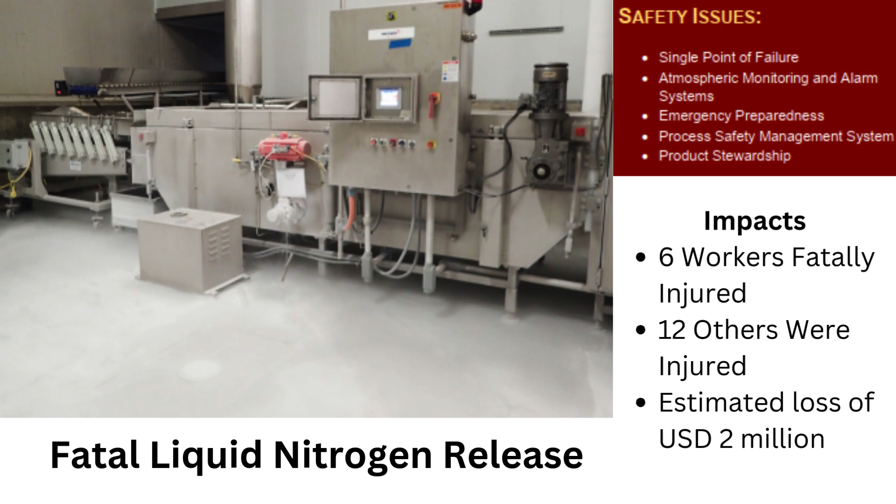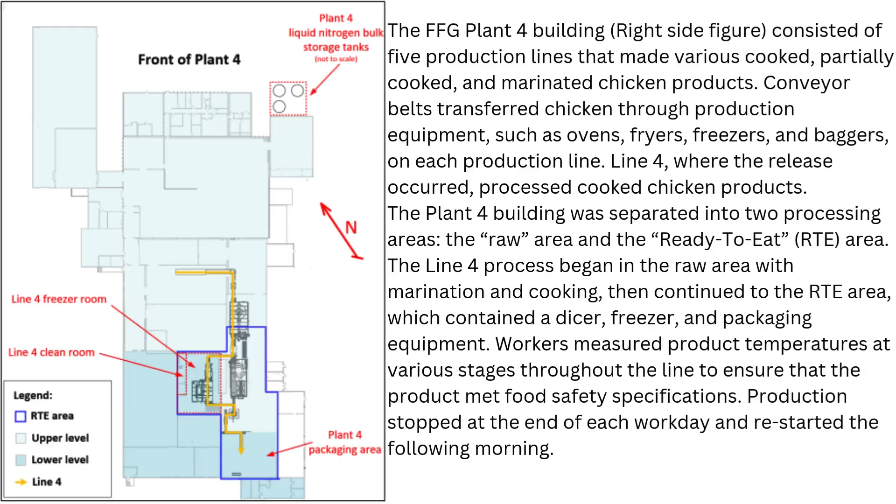On January 28, 2021, a catastrophic liquid nitrogen release occurred at the Foundation Food Group plant in Gainesville, Georgia. The incident happened during maintenance on a liquid nitrogen immersion freezer, resulting in the release of vaporized nitrogen that displaced oxygen. 6 workers tragically lost their lives to asphyxiation, and 12 others, including a firefighter, were injured.

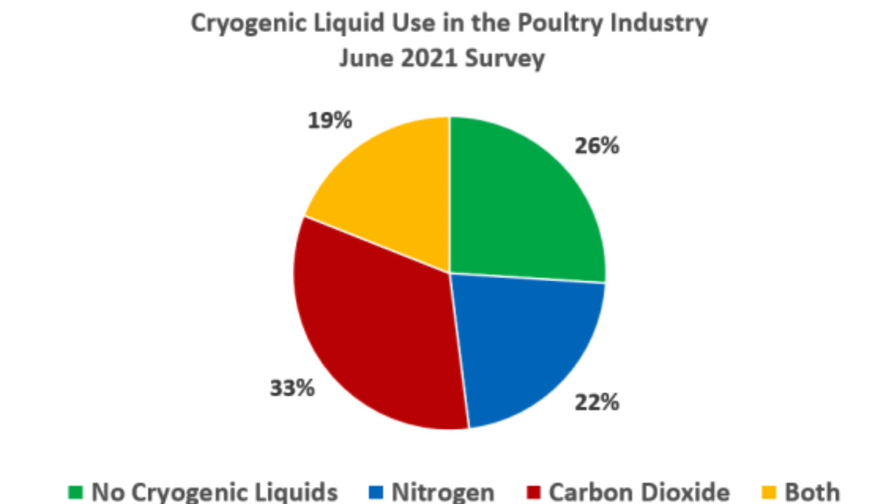The release also caused extensive damage, with losses exceeding $2 million. This tragedy highlighted critical flaws in safety measures and emergency preparedness at the facility.

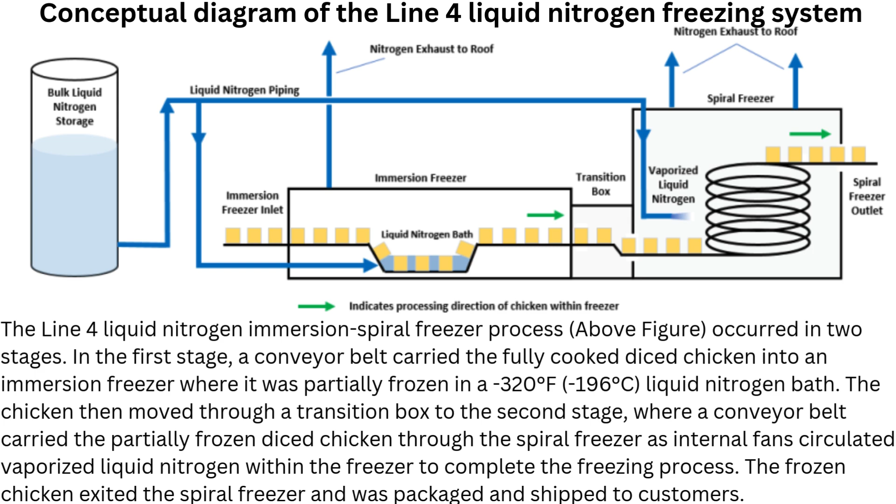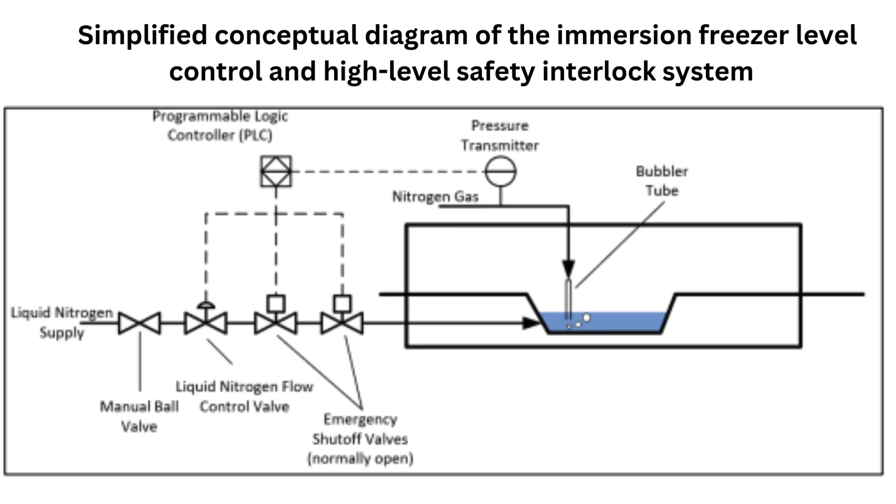What happened? On January 28, 2021, maintenance workers began troubleshooting operational issues with the immersion freezer. During this process, a bubbler tube used to measure liquid nitrogen levels became bent, causing an uncontrolled overflow of liquid nitrogen. 8:40 a.m., workers noticed a white cloud in the freezer room but did not perceive an immediate threat.

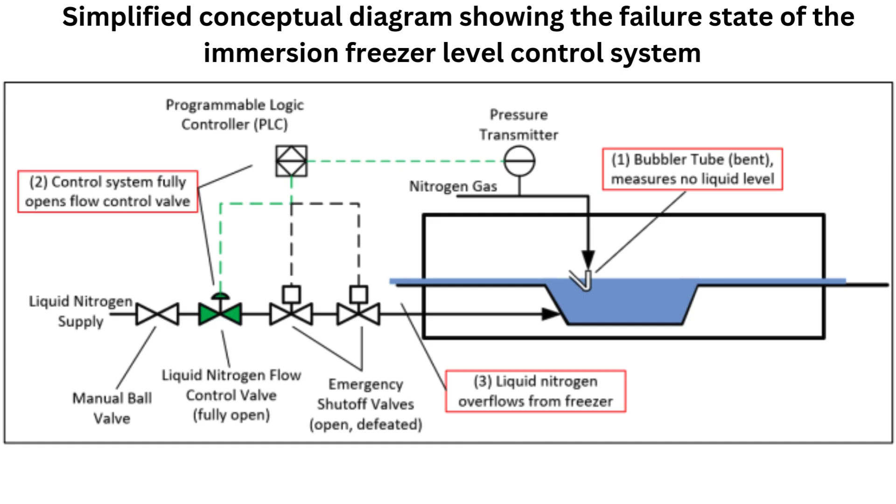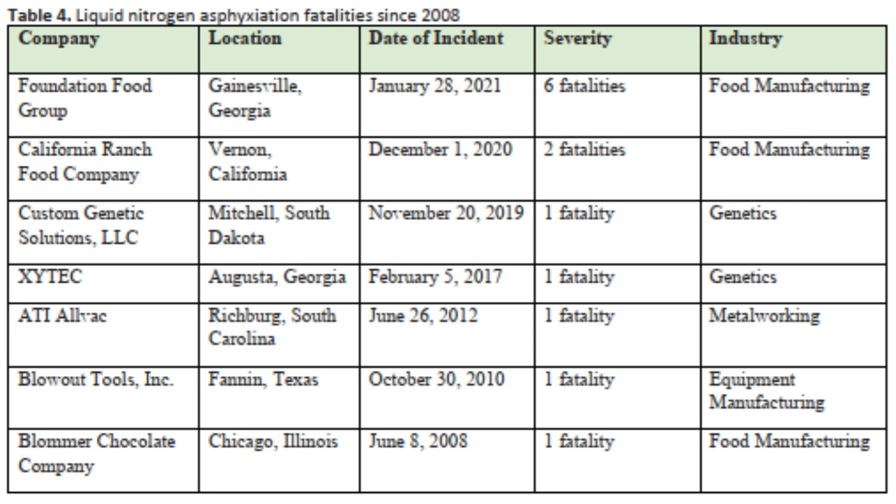9:55 a.m., the incident was reported, and employees began evacuating. Attempts to rescue 2 unresponsive workers led to further fatalities and injuries as others entered the oxygen-deficient area without protective equipment. 10:15 a.m., the liquid nitrogen flow was manually shut off, and emergency responders arrived, equipped with breathing apparatus. Rescuers evacuated the building and recovered the deceased and injured workers.

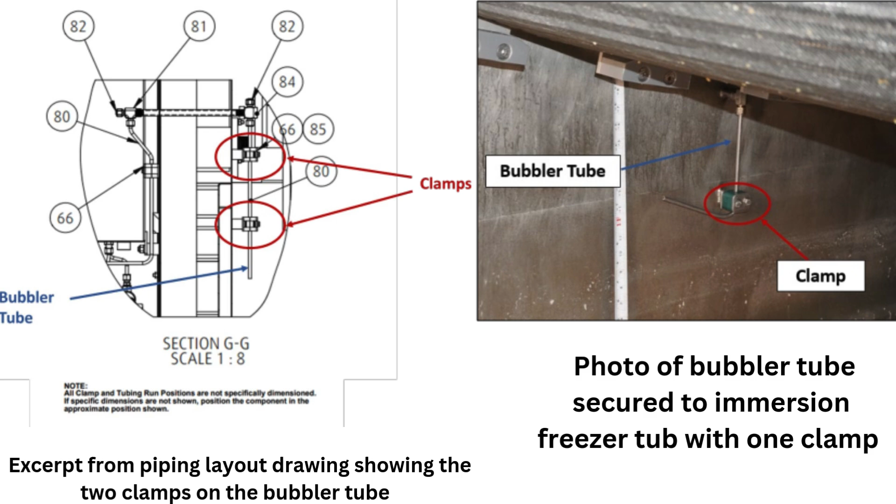What are the root causes? Single point of failure. The freezer's bubbler tube was the sole safety component controlling nitrogen levels. Its damage disabled critical safeguards, leading to the release. Lack of atmospheric monitoring. The facility had no sensors to detect oxygen-deficient conditions or trigger alarms.

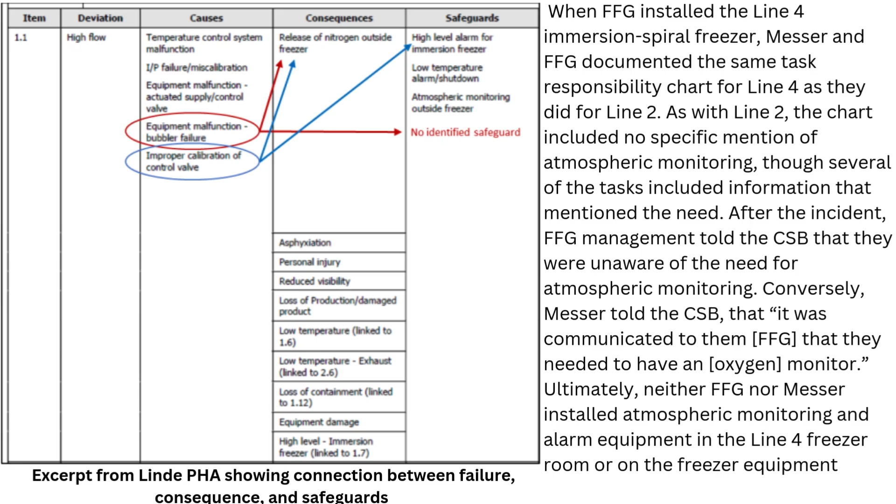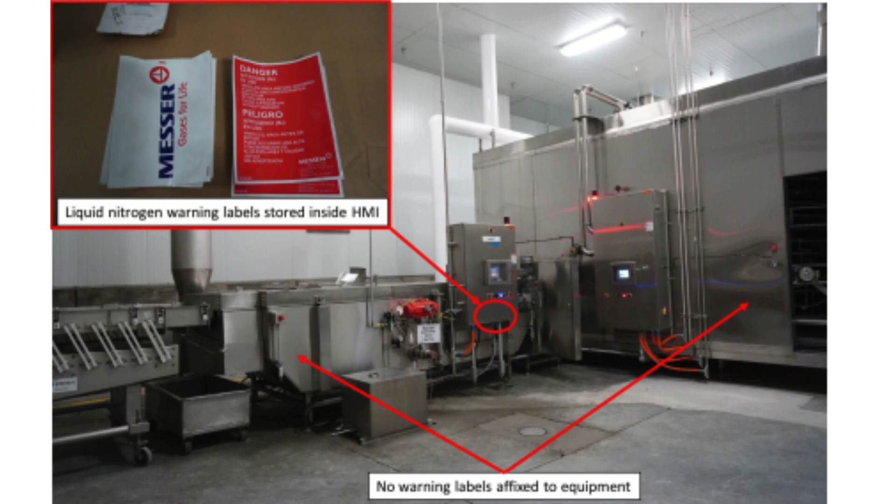Inadequate emergency preparedness. Workers were not trained in the hazards of liquid nitrogen or emergency response procedures. Design and regulatory gaps. The freezer design lacked redundancy, and there were no regulations requiring safety systems for cryogenic asphyxiants like liquid nitrogen. Key lessons and mitigations.

Enhance equipment design. Include redundant safety measures to prevent single-point failures in critical systems. Install monitoring systems. Use atmospheric sensors and alarms to detect oxygen-deficient conditions.

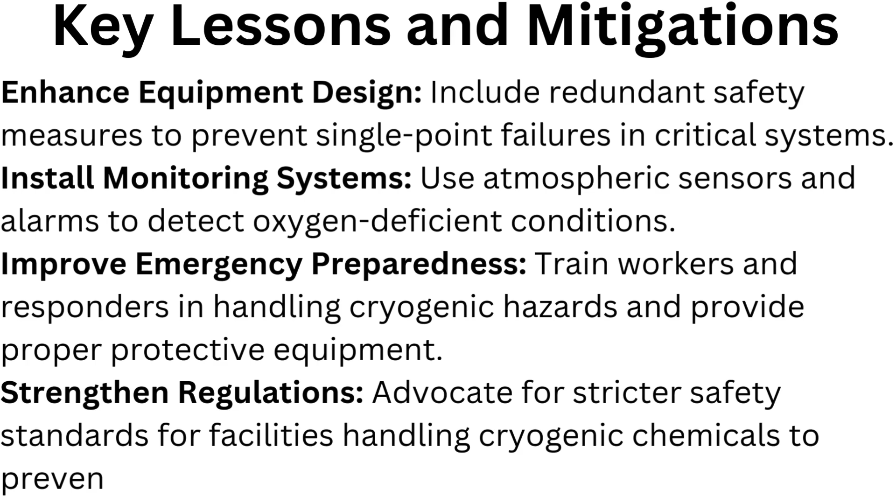Improve emergency preparedness. Train workers and responders in handling cryogenic hazards and provide proper protective equipment. Strengthen regulations. Advocate for stricter safety standards for facilities handling cryogenic chemicals to prevent similar incidents.